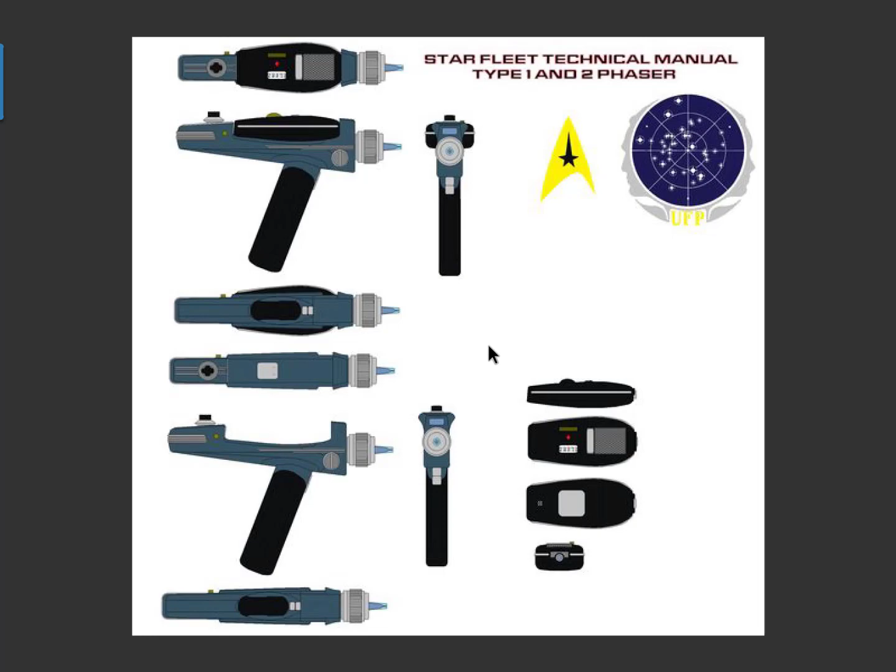I am in Bridge, and I'm going to move this out of the way so we can see what's going on. In Bridge, you're going to use this to work out your ideas. Now, whenever you're creating anything in 3D, always have a reference, have a reference, have a reference. That's how you learn this stuff best. I've got several references here, as you can see. I'm holding the space bar down to go to full view inside Bridge. Bridge is software that allows you to preview imagery. So I'm always using references, and I'm going to use references inside the software itself, so I'll always have a visual cue as to how I'm designing and where the design is going.

Those references, I'm going to show you what I'm using for the software right there. I did a grayed out background in Photoshop, kept the black line on a grayed out background so it's less distracting visually. I've got my front view, my side view, and my top view, and you can see they're lined up exactly, accurately with one another.

So when I bring this into the software, I can design accurately. If anybody has any questions, stop me anytime and ask. Okay, we'll get a little dialogue going here.

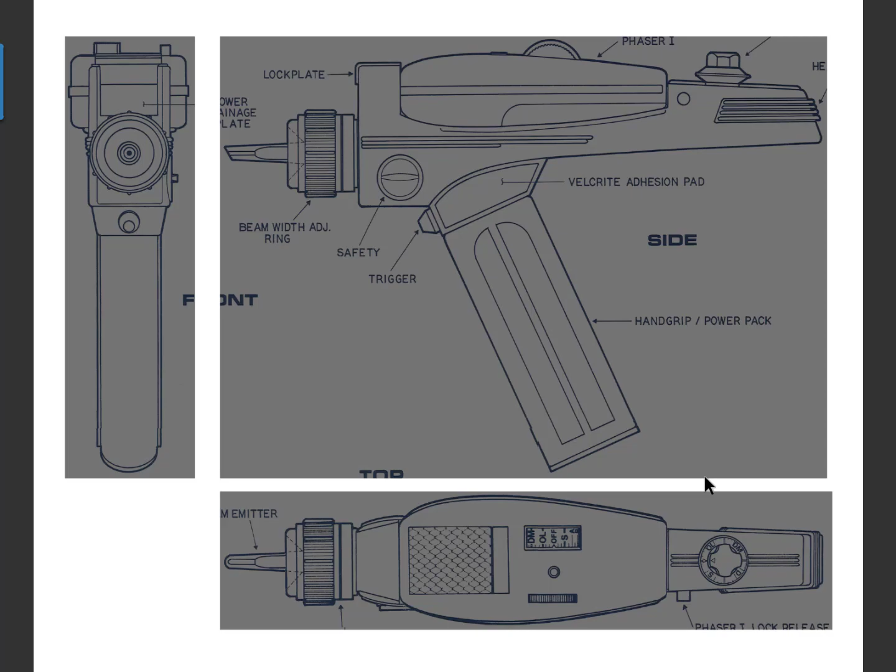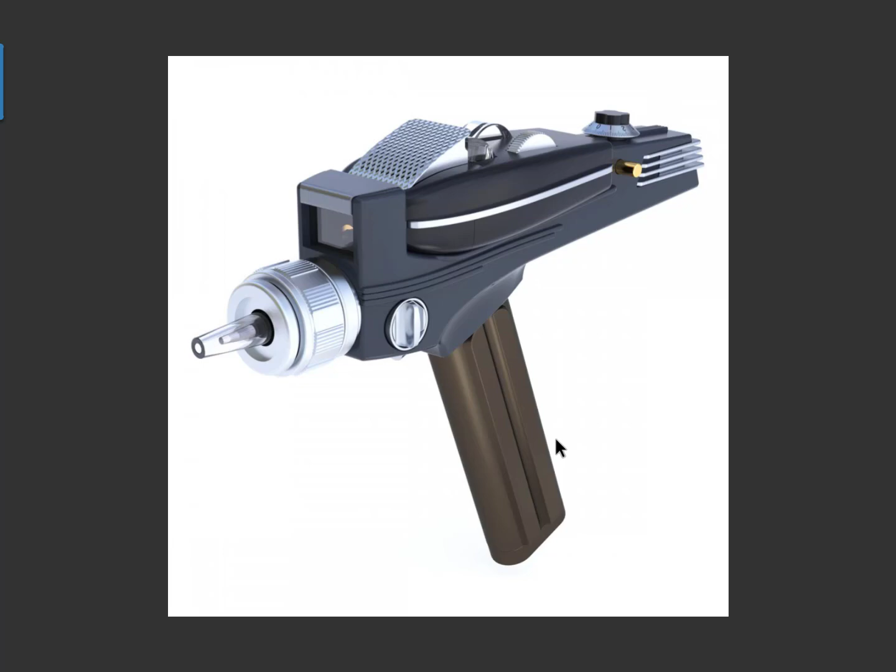So this is what you're going to eventually end up printing out, so you need to strategize all the time. There is no one way or right way to design something for 3D printing. You just have to figure out what is best for you, what's best for your client, and figure it out from there. So I'm looking at this phaser.

I'm thinking, okay, print the nozzle. This I want to print in clear, so I have to think about that. I want to print that in clear, that's going to be a separate piece. I want this here to be another separate piece. I want the body here to be my third piece. Obviously the type 1 phaser on the top here, I want that to be its own piece. The handle is going to be another piece. So you're going to think about how you want to design this.

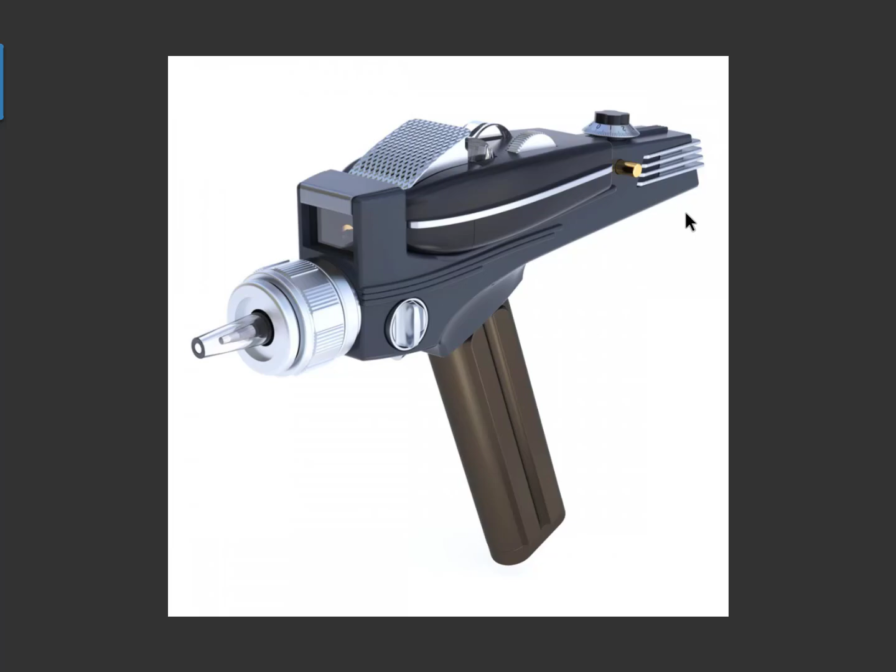So, all right, let's get inside of Blender. I've already created something with the images in there, just to save time, because an hour is not enough time to do this. I'm going to go get that image, go to Open, and I have one called Backgrounds Only. I think I named it Background Only, right there, there it is. Okay, so there's my setup.

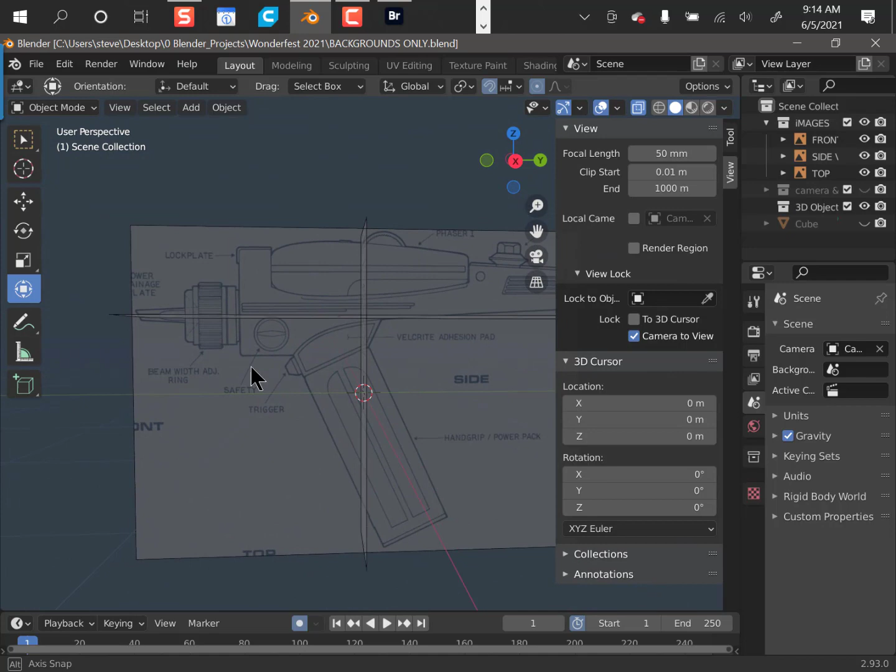All right, so my side view, I got them all lined up in there. Now, does anybody need to know how I actually created it in here? You don't? Yes? Okay, I'm going to show. If I see a yes, the yes wins no matter what. All right, what these are basically are 3D objects called image maps. In order to bring this in, it's really, really simple.

Here's some basic keyboard shortcuts you need to know in Blender: how to go to your front view, how to go to your side view, how to go to your top view. Number 1 is always your front view. Number 3 is your side view, using odd numbers, and number 7 is your top view. It's that simple, right? So 1, 3, 7.

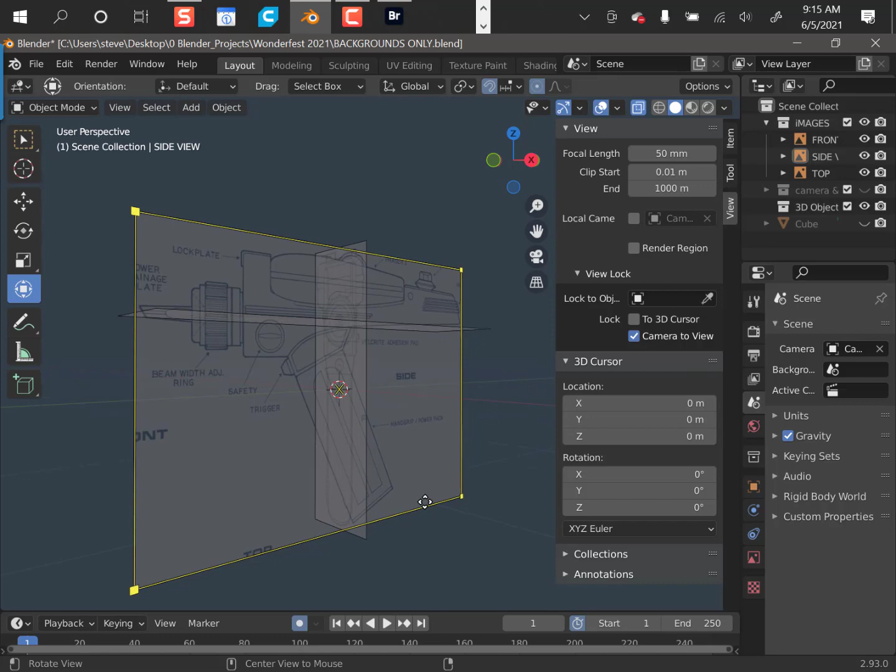If you want to go back to perspective view, hold the Alt or Option key on your keyboard and click and drag, and it automatically goes there. You could use the shortcut number 5 too. You have a PC? Doesn't matter, PC and Mac are the same shortcuts. Alt is Option, Command is Control, that's why I say both. I just don't want someone looking for their Option key and then deciding to commit harakiri.

Well, if they want to commit harakiri, that's not our problem. The Option key, I can't do that. If they want to die over this, that's their problem. I want to create cool stuff.

Okay, all right, so there it is. I'm going to show you how I did it. Go to the front view.

Here's the key: you have two modes in Blender. Your editing mode for designing your stuff, and your object mode to move your stuff around. I want to say move your shit around, but I'm trying to keep this PG. The way you switch between both modes is hit the tab key on your keyboard.

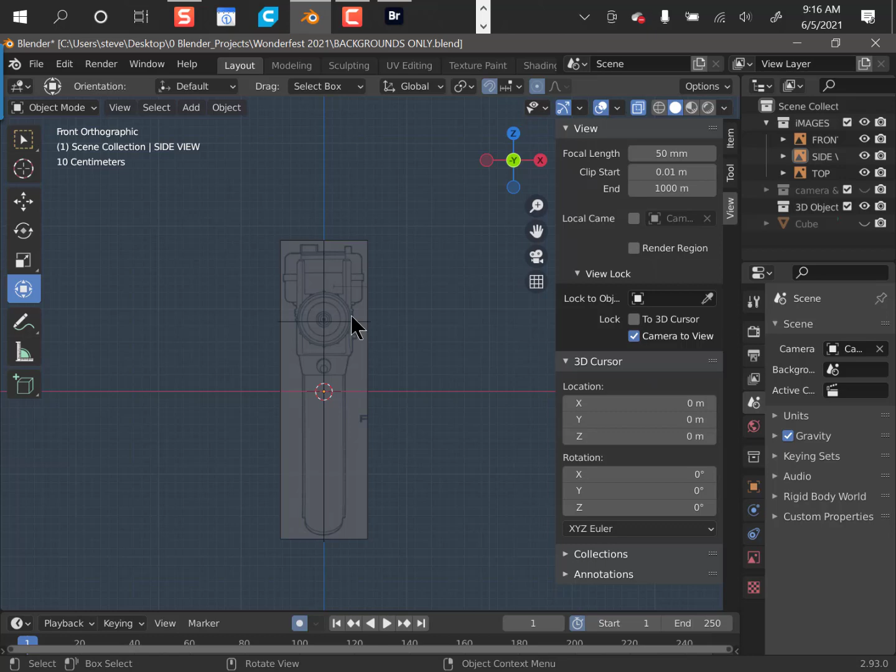So if I go to object mode, I'm in the mode that I can actually bring images in. Now how do I do that? Go to bridge, we'll bring in something different, just for fun. Offset it a little bit off to the side, click and drag it, and release it. That's it, it's that simple, right?

So now if I go on the Blender, Alt, remember, there it is. Do I need that? No. So it's selected, it'll show up over here, it'll be called empty. I don't want it. Hit delete, it's gone. Okay.

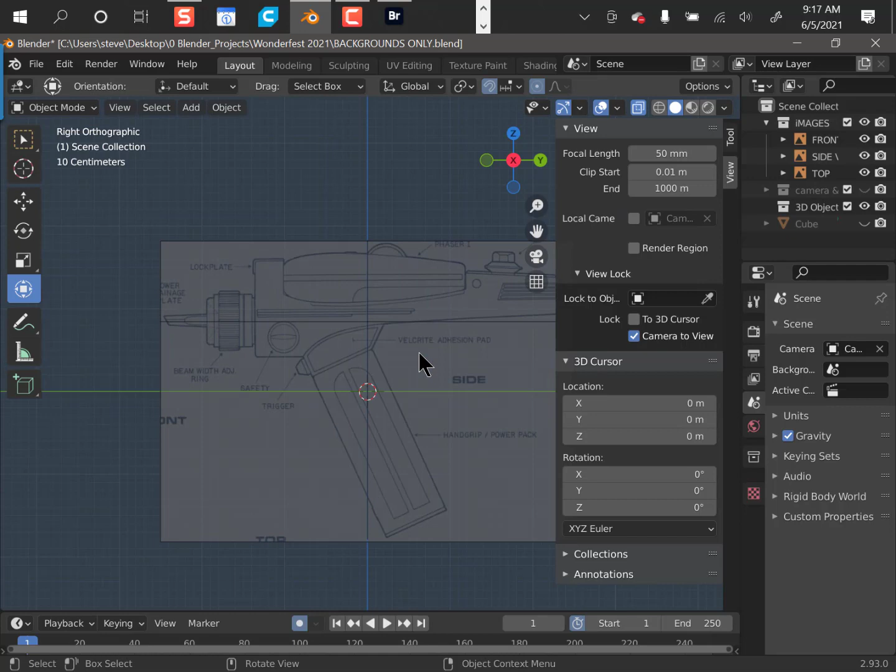All right, now we're going to start designing. One, three, seven, all right, so keep that in mind. Every time you see me switching, you know exactly what I'm doing and where I'm going. Let's go to the side view, number 3. We're going to start planning out together what we need to do.

So we're going to be using primitives. Primitives are pre-designed shapes. You're going to be designing everything you ever want to imagine with primitives, no ifs, ands, or buts. Okay, could you do it point by point? Yeah, but that's OCD business, we don't do that. Okay.

So I'm going to go get a primitive. The way you access all of your primitives and all of your tools is a shortcut called Shift A. So Shift A gives you these different menu systems. We want the mesh, and the mesh we want is going to be a cube. So I'm going to select it, and there's my cube.

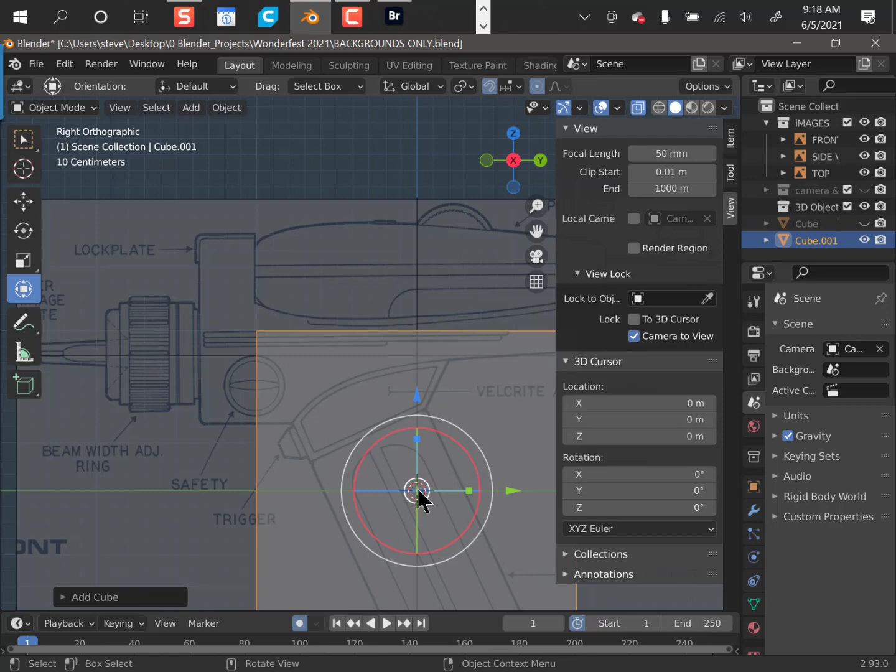Now this cube, I can adapt. I can resize, click dead center and move it wherever I want, or I can use a shortcut key called S for scale, and decide to just resize it down. I'm going to put it about like this. And then a left click will commit my changes. Let's go scope this out.

We're going to start with the body. I'm going to drag it right down here to the bottom, or I'll use the top first. I'm going to try to get it about the same thickness as this top portion here. And right here, I'm using this option down here, called the transform option. This allows me to transform it from top to bottom or rotate it all in one.

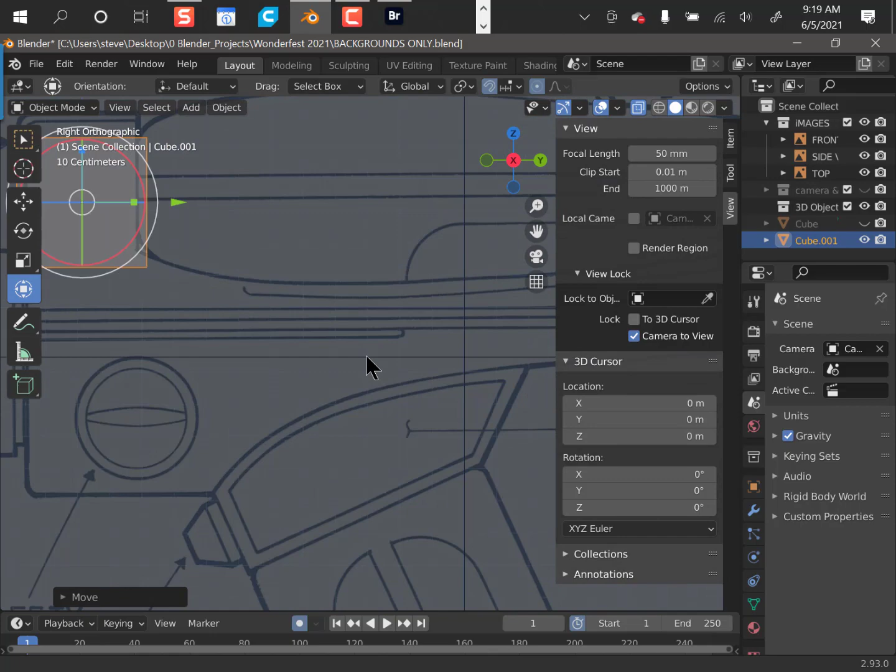So I'm going to hold Control and Alt together, and left drag up and down allows me to resize. Alt and Shift held down together and left click allows me to pan. I'm going to get in close so you guys can see this easier, and I'm going to take this little option to resize on the Y-axis. Okay, that looks good right about there.

Now I'm going to take this and bring it down. Go hit that top arrow there, drag it straight down, and put it right here at the bottom. Now what I'm going to do is I need to grab that top polygon.

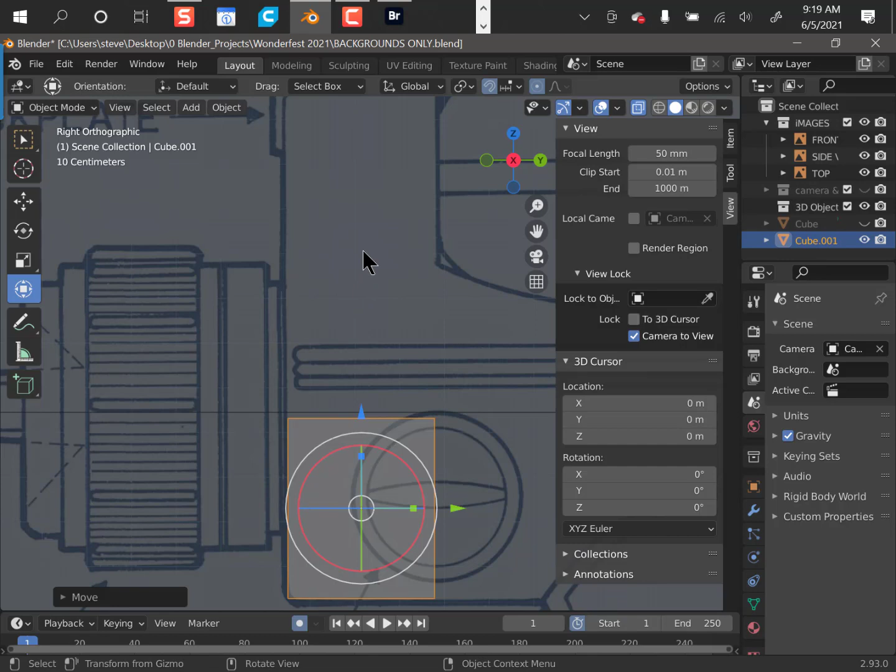Now I need to go to edit mode, so I hit the tab key, click on edit mode, right? Now I can edit my points, my edges, and my polys. If I click anywhere, it deselects everything. Now here's the trick: the number 1 key on the keyboard is for selecting your points, the number 2 key is for selecting your edges, and the number 3 key is for selecting your surfaces or your polys. I want to grab my poly.

Click and drag. And this is the newest version of Blender, it was released two days ago. Blender is a free software, and it's damn good. The Maya people are dropping Maya and going to Blender. It's a professional, tried and proven, ready for production software, and it's a pain in the ass to learn.

Okay, 3D is not for the faint of heart. So if anybody wants to come in, they can come in and sit in the middle aisle here. I saw people looking in back there.

Okay, here we go, the top. Now, if I want to make sure that top is selected accurately, Alt or Option to drop me out of this view to take me into the perspective view. Okay, it looks good. Hit number 3 again to go right on back.

Now, come over here, Transform tool. Bring it up. I'm going to bring it up to right about there. Okay? All right.

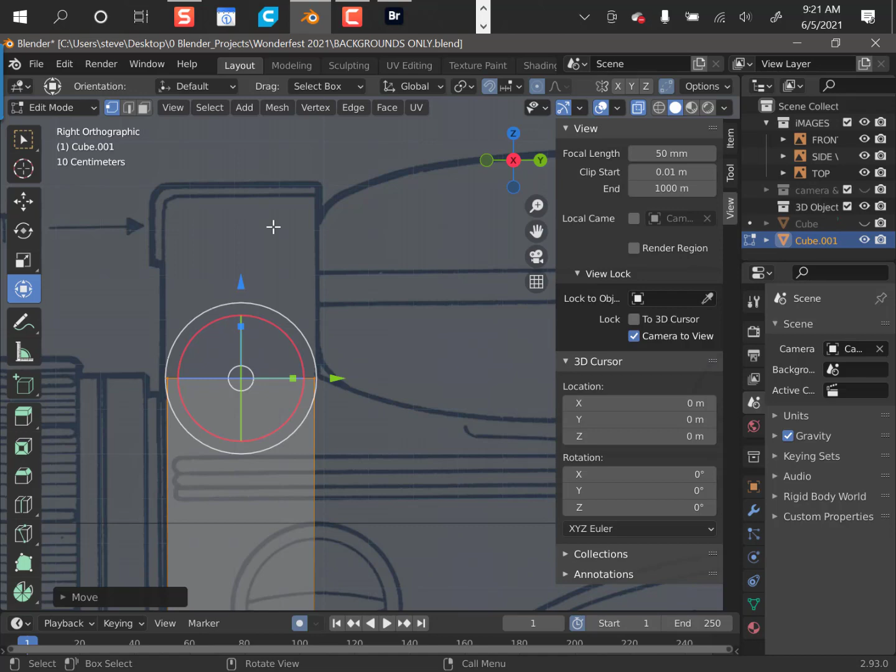So what I want to do next from here is extend another piece, because I need a section going off to the right, and I also need another section extending to the top. I'm going to do the top first. The shortcut for extending anything is, what do you think? E. Hit the E, it automatically extends it along its normal, right? I'm going to left click and it commits it. Okay.

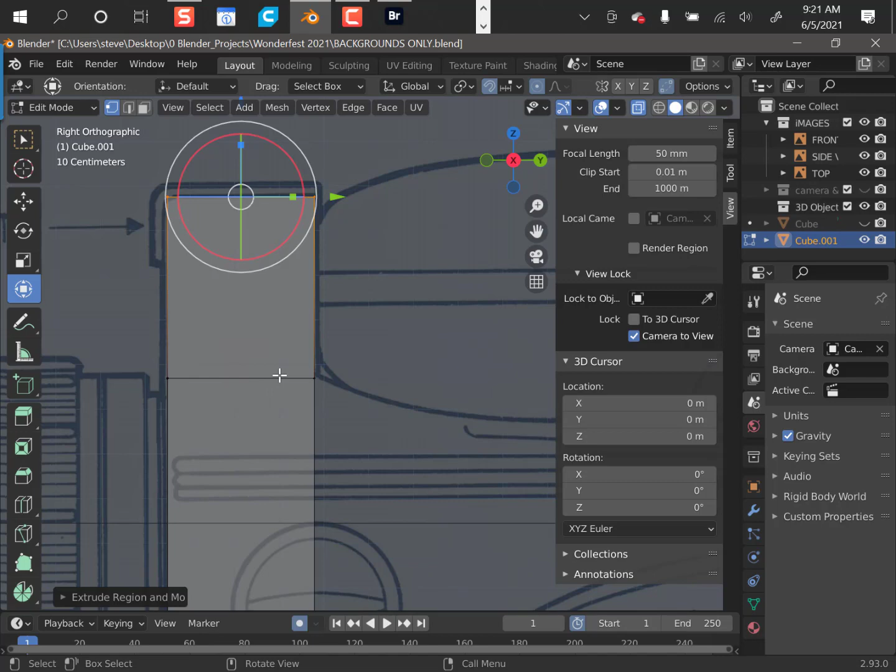That is not two separate objects. That is an extension of polys on one object. So if I click and drag it here, and kind of pull it on over here.

Here's another little option I think you guys might enjoy. If I go to my edit menu, go to my preferences, those shortcuts I just mentioned about navigating, you will find under the input. You emulate 3-button mouse, make sure that is checked. Okay, there's another one too that I'm trying to remember.

I think it's under... it's for allowing me to rotate around my selected objects. I think it's under navigation. What was that? That's it, do you see it up top? That's it, right there. Okay. Once that's selected, it'll orbit around whatever I have selected. I find that very handy.

All right, so I'm going to bring this down, zoom this down a little bit, bring it to the side, and let's go get this side over here. So I'm going to come over here, grab this polygon. Make sure I'm in edit mode, by the way. Go to edit mode, rotate this around, and go grab this.

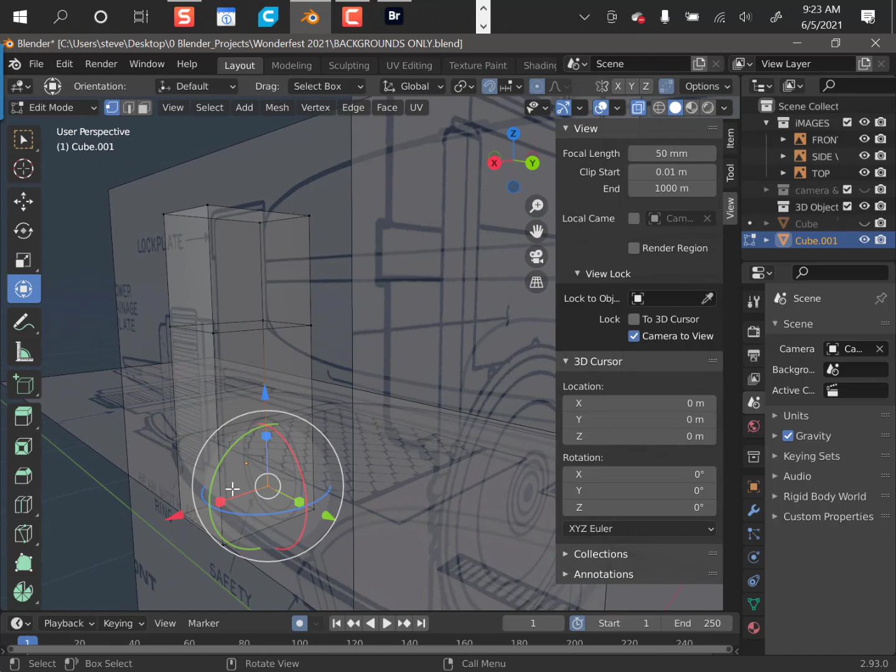So it's still... oh, I'm in point. Sorry, what key do I need for polys? Excellent, keep that in mind, it's going to be a test afterwards. So there we go, hit the 3 key, go back to this mode here. I'm going to zoom back a little bit, and I'm going to extend this with the what key? E. Yes, sir.

So the question is why is it going to extend from this polygon? And the reason it's going to extend from that polygon is because it's selected.

Oh yes, okay, that's a good question. So the question is are these two separate polygons when I actually split these two from the extension? That is correct, they're now two separate surfaces. Okay, so if I hit the E key, it's only going to extend off that one.

Now watch where I'm going. I'm going to go right to the beginning. See this little bottom handle thing right down here? I'm strategizing, right? I'm putting these in a position for a reason. All right, so let's keep thinking.

I am going to go to right about... before I even go any further, let's do this. Let me go back a little bit. I'm going to go back one step, all right? Go to the top view. And the reason I'm stopping here is because I want to make sure this matches from the top view.

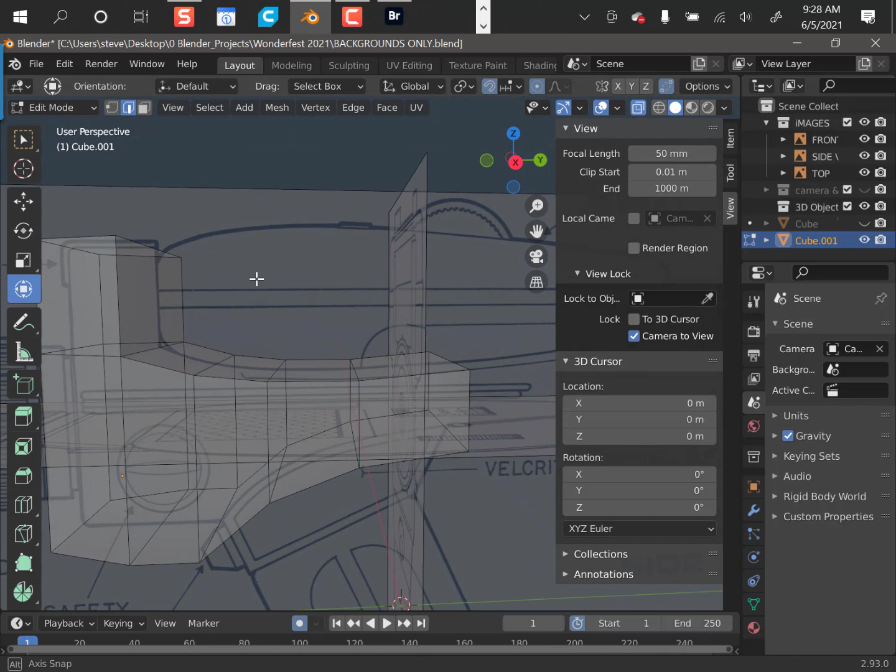All right, now just for fun of it, take a look at it. Okay, cool, look, it's getting there. It's getting there. Hit 3 key, go back. Time to go back to work.

Now, I stopped here, I started here. These little sections where this bottom portion of the handle is, I stopped at each of these sides for a reason, because I know I want to extrude a shape out of this. So I have to make sure I have the polygons in place.

All right, okay, here we go. So now I'm going to extend this out. Number 3 key, same thing, same work mode.

E key for extend. I think I can probably take this to right about there, that'll be good enough. Click it, bring it up, push this back to here. That's really where I want it to go.

Why do I want it there? That's right - if you take a look at this, this needs to extend up, so I got to strategize. Okay, I need some... matter of fact, I might want to grab that surface, just move it out a little bit more. I'm being anal at this point.

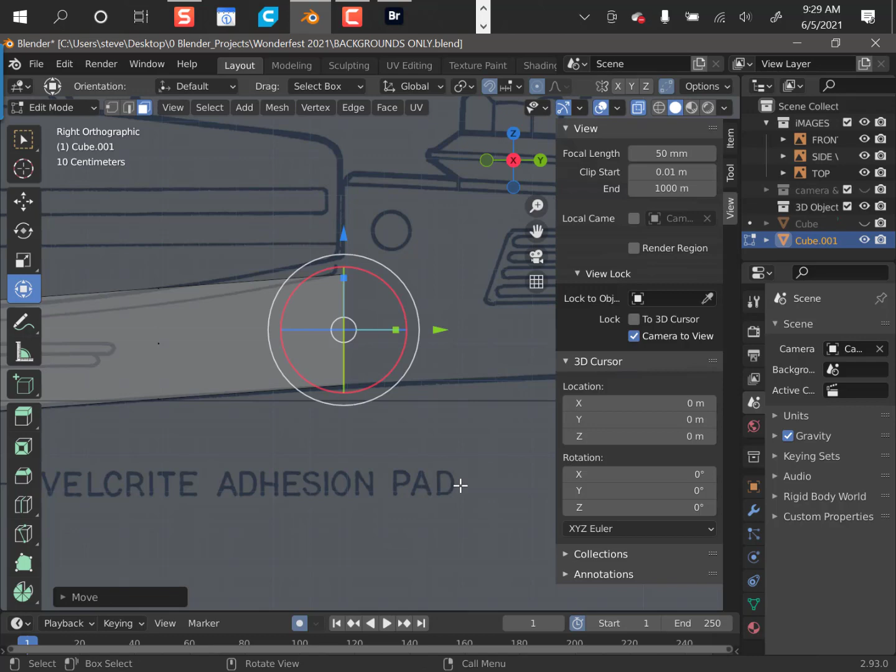Okay, so I'm going to push it on back, and let's extend this again. E for extend, pull it on out to here. Left click. I can just click in the middle, put that about where I want it to go.

Go to the number 2 key for the edge, and then place the edge where I want it, just like that. Making sense? Okay, let's go get the surface right there and do what? Excellent - extrude, just like that.

Done. Hit the number 2 key, grab that piece. Making sense? All right, so we're not done.

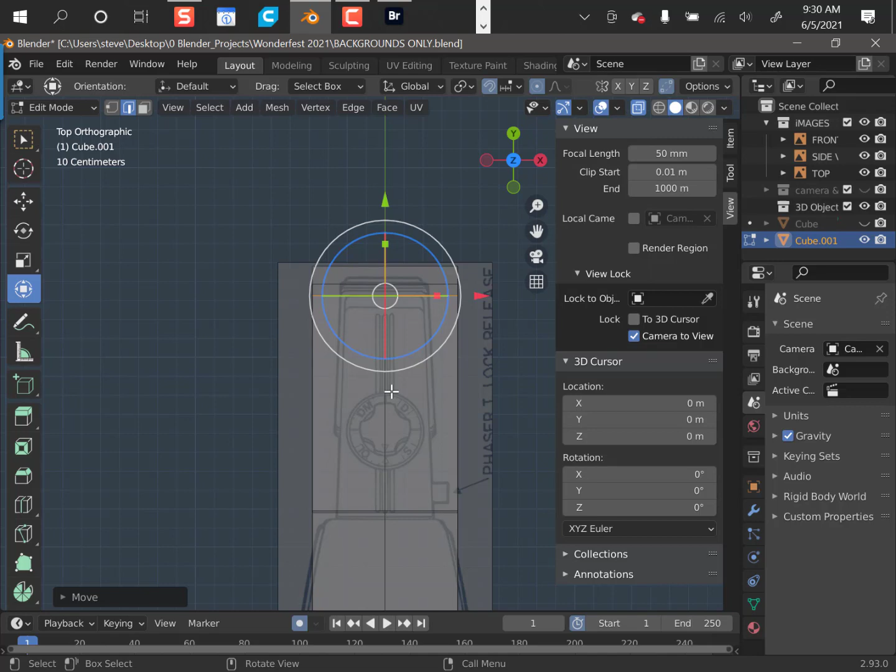Go to the 7 - if I hit the home key, it fits everything in the view, but it's also including my cameras and my lights. So if I go to the cameras are off, it doesn't matter, I'll just zoom in and manually zoom in forward.

Now I know that this taper actually tapers, right? It's not going straight back, and we can see this from the design underneath. So what we're going to do, let's go back to here, let's get in close.

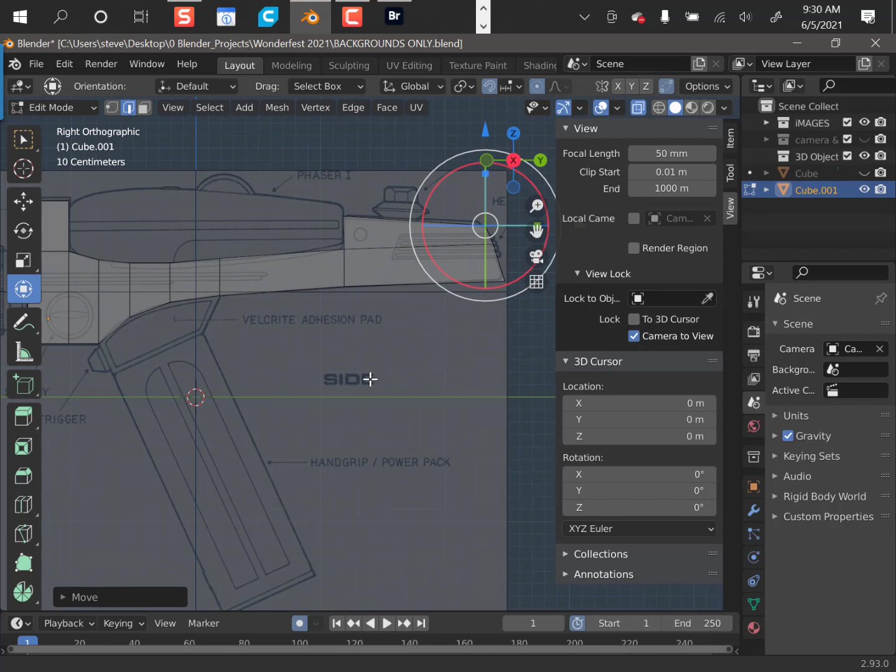And right about, let me go hit number 2. And right about there, that edge there, I want to start there. So I'm going to...

See, what we'll do is, I'm going to come right over here, and I'm going to select everything - you're going to see why in just a moment - from this edge back. So number 3 key on the keyboard. Let's see if I got that there.

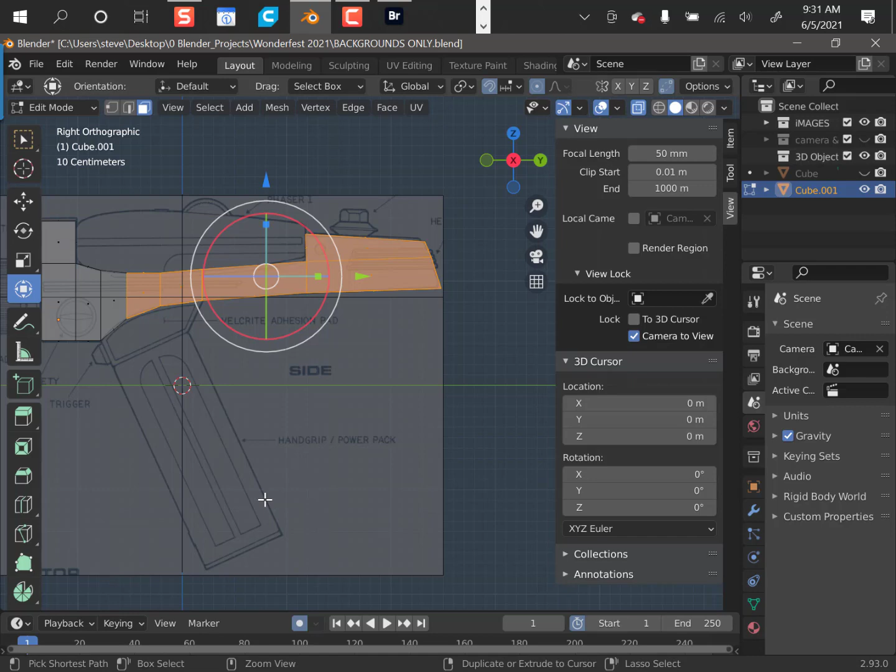Did that work? I think that worked. I'm going to Control plus, which allows me to extend the selection. Control minus allows me to retract the selections. So from here...

Okay, I'm going to go to the top view, and I'm going to start to just manually taper this, just for educational purposes. So I'm going to pull that in just a little bit. Just a little bit. Control minus. Pull that in just a little bit.

There we go. And I'm going to pull that a little bit. Control minus. Pull that in. See where we're going? Control minus. We're almost done. Pull that in a little bit. And we're almost matching the back end where we need it to go. Control minus again. Just a little bit. Control minus. Okay, I think that's going to work. Yep, I think that's pretty close.

Okay, so now we've got the shape of our phaser. We're done with the body. Alright, so now what we need to do is extend out this little bottom portion here, right?

So if we go back to Bridge, let's go to pull this on over here so I can get this on over. Can I tap on Bridge to bring this over? Let's see if I can do this. Okay, so this little section here, I've got to extend out. Okay, so now we have to make that happen.

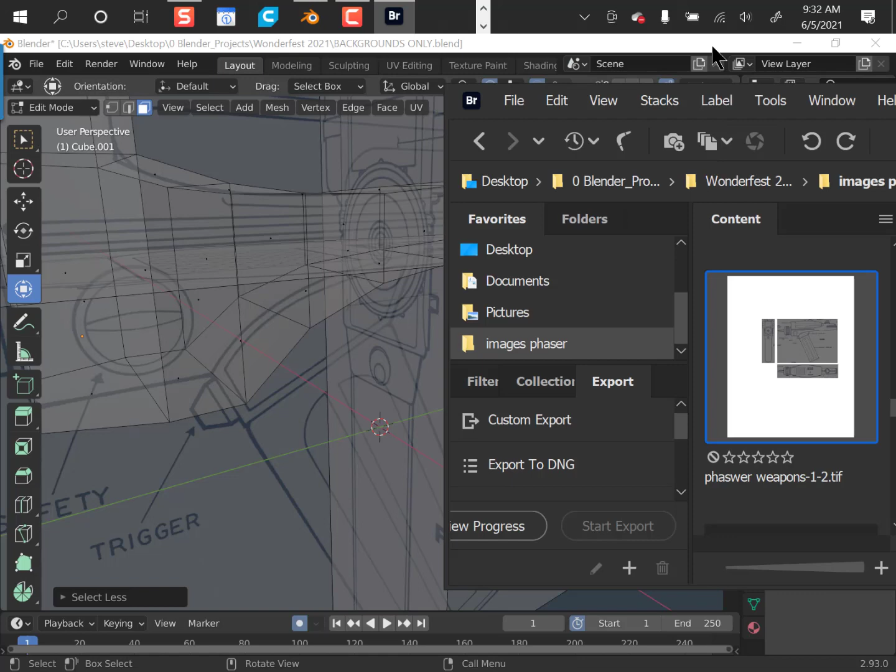Let's go and grab that. Go right underneath here. And what we're going to do is I'm going to make sure I'm in the polygon select mode. That one. Now, I selected the wrong thing, so I want that one. Hold the shift key, we'll add to it. Shift key, add that one. So that's the surface I want to extrude something.

So what I'm going to do, but there's a little bit of a bevel to this, is inset those polys. The shortcut is hitting the I key on the keyboard. And look what I can do, I get to inset a little bit. And I'm going to left click and it commits my changes. I'm going to get in closer so you guys can see it easier.

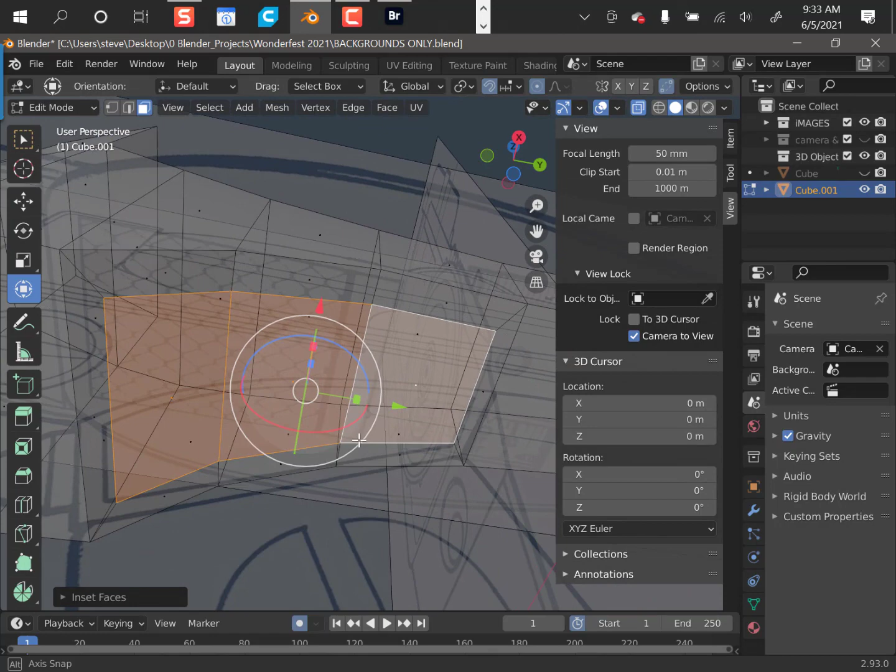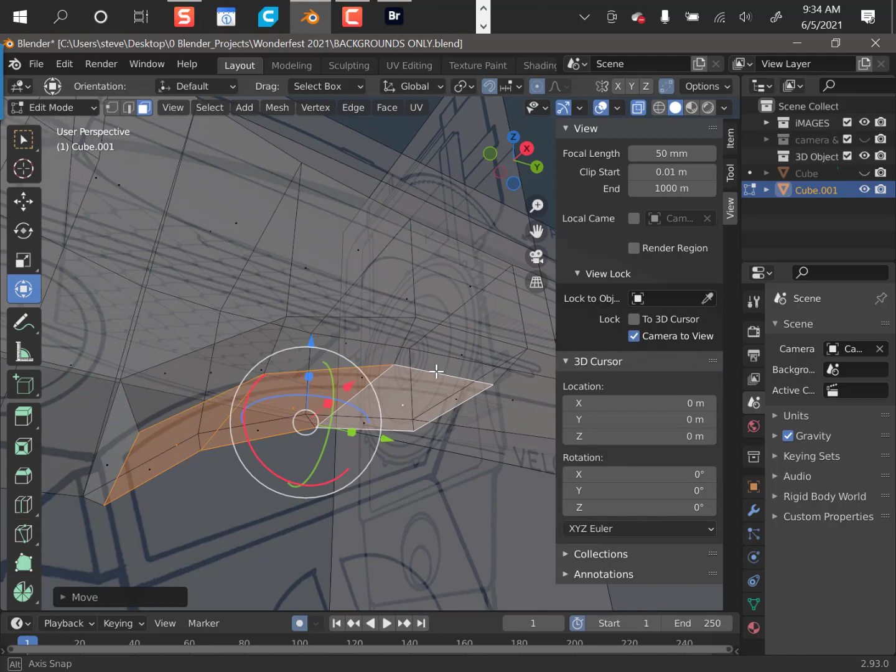Now if I go to the E key, I can now extend that out. See? So now, Alt key, there it is. You've got your extension. Okay, so let's take this and let's extrude this. Go to the side view, and if you take a look at it, really, it's really this little thin line up in here. I've exaggerated mine. If I want to be more accurate, I can always bring it up like this and do something like of that sort.

Now, I'm going to hit the E key, and it's going to extend that out. Done. All right. So what I'm going to do is straighten this out. And I guess what I'll do is I'll go to number 2 key, select those 2 edges, right, all these edges right there, and just line it up just like this. Go grab this edge there and bring it over.

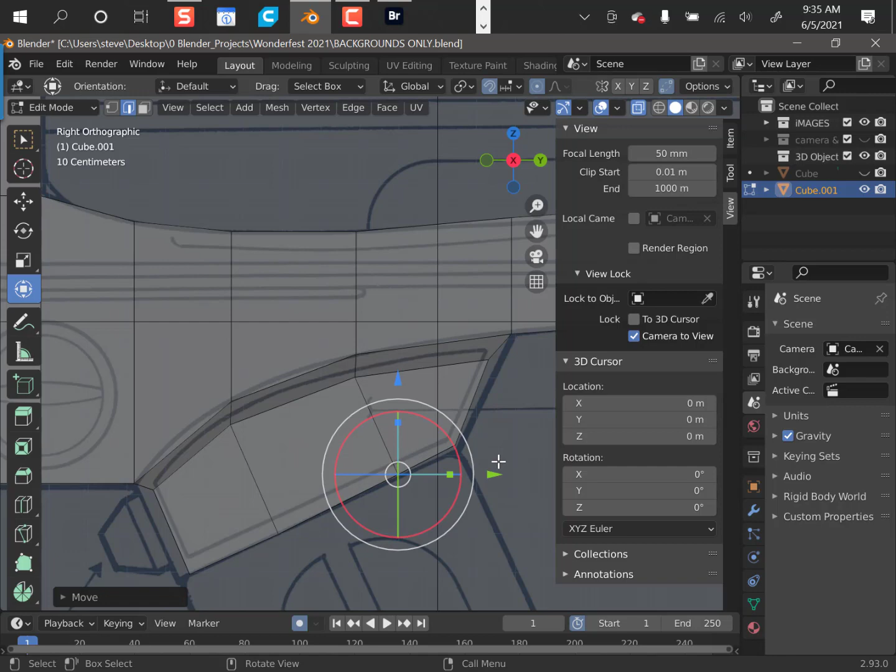Mine will be a little bit low, just inside, but that's alright. You guys get the point. In fact, I might just go ahead and bring this on down. There we go. Okay, there we go. So, Alt click, drag it out. See? There's the bottom portion. Oops, get out of here. There's the bottom portion of our phaser. Is that making sense?

Alright, so that's the type 2 phaser. Let's do the type 1, the one on top, right? So, no questions at this point?

Someone else had a question?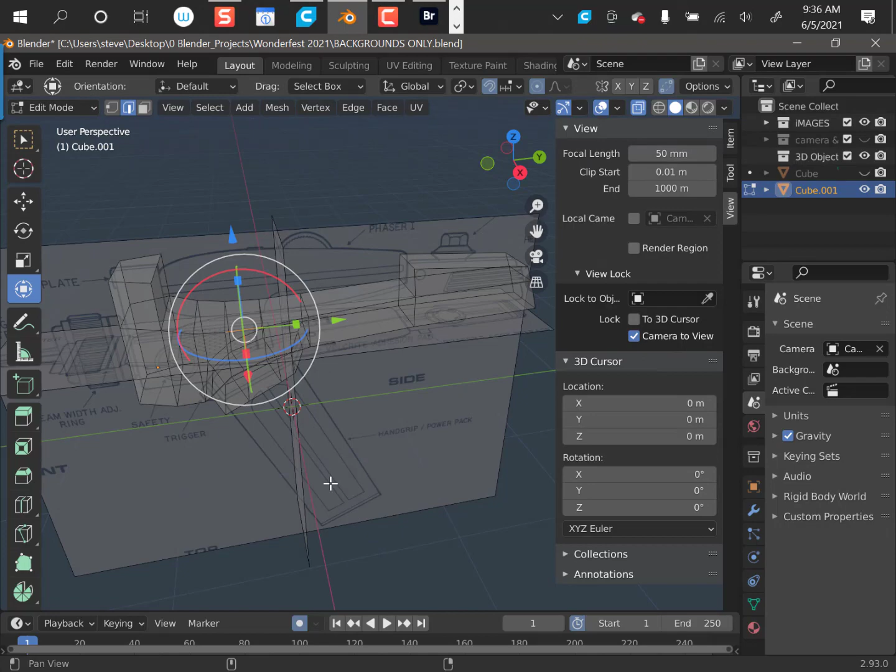That's right. Okay, so the question is that he's noticed I'm using two-dimensional images here that I'm utilizing to create my wireframe. And the question is, did I create those? I just went online to Google Images and found the images, and that's basically in Bridge here, which I can't see. Like, there we go. I won't move that out of the way again. That's where they came from, right here. So I went to Google Images, found... Actually, I'll show you the actual one I used. I should have it in here, right there.

That's it, that's the actual one I used. That is correct. I sliced the pictures out of this, turned them black and white, made sure the lines are really dark so it's easy to see, and then dropped the background to medium gray, from white to medium gray. We don't have time to go over that.

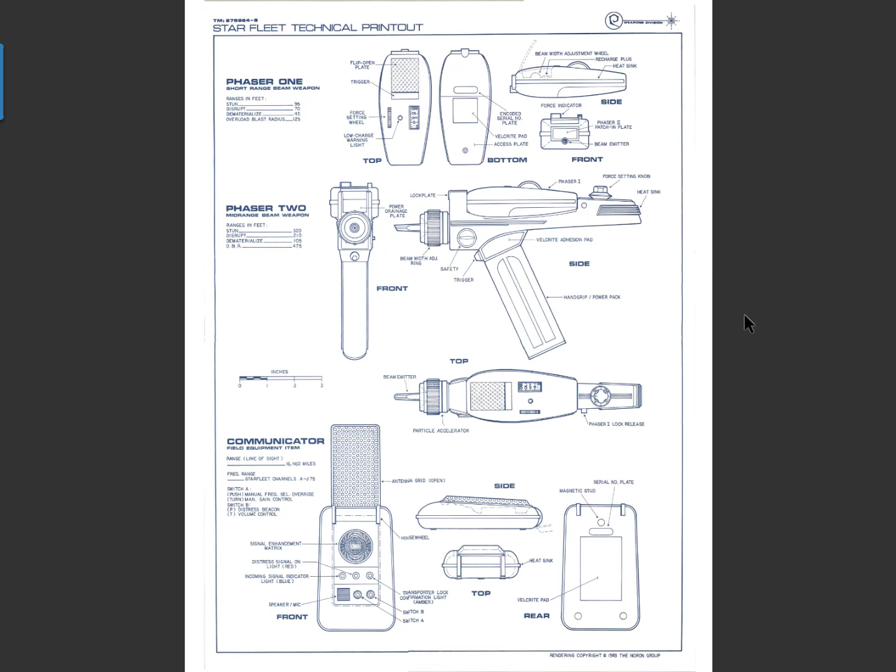When you extended the bit to go to the grid, and you've got 3 polygons across there and you were lining up the edges, how would you go about combining all 3 of those polygons into one flat surface? You don't. You don't want to do that. You want to keep those surfaces.

How many people here like podcasts? Nobody does podcasts? What was that? Oh, just listen. Just create them, create them. No, okay, all right, that was another question I was going to ask.

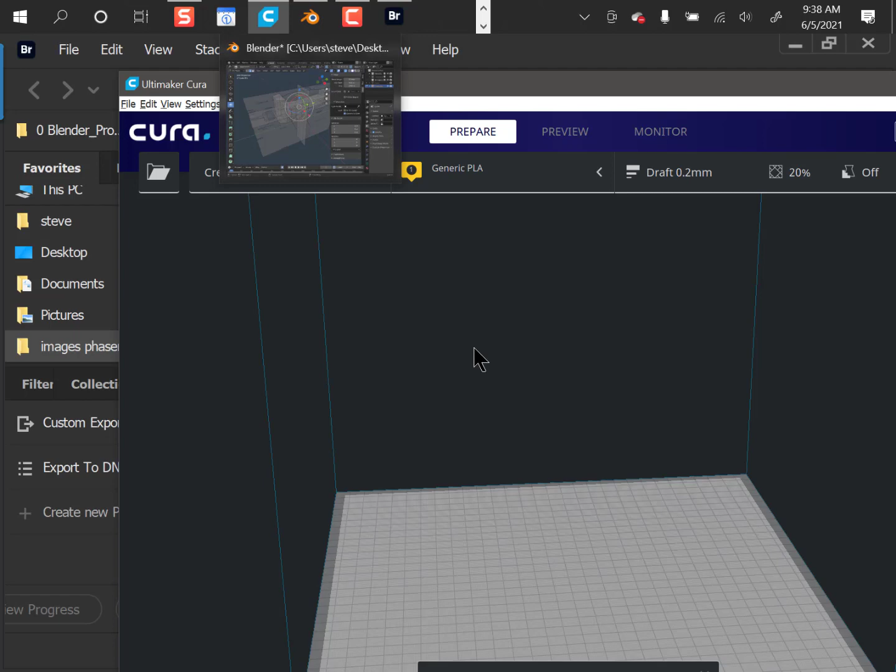But anyways, let's get back into Blender. This is a 3D printing software. I want to show you what's going to happen to them once we create them. But anyways, we'll come back to that in just a minute.

And we'll move right along. So we're going to come up here. I'm going to quickly create the type 1 phaser, and then we're going to go and do the nozzle. We're not going to have time to finish the whole thing, but it gives you the thought process and standard techniques you're going to be using to pretty much create anything you want in Blender.

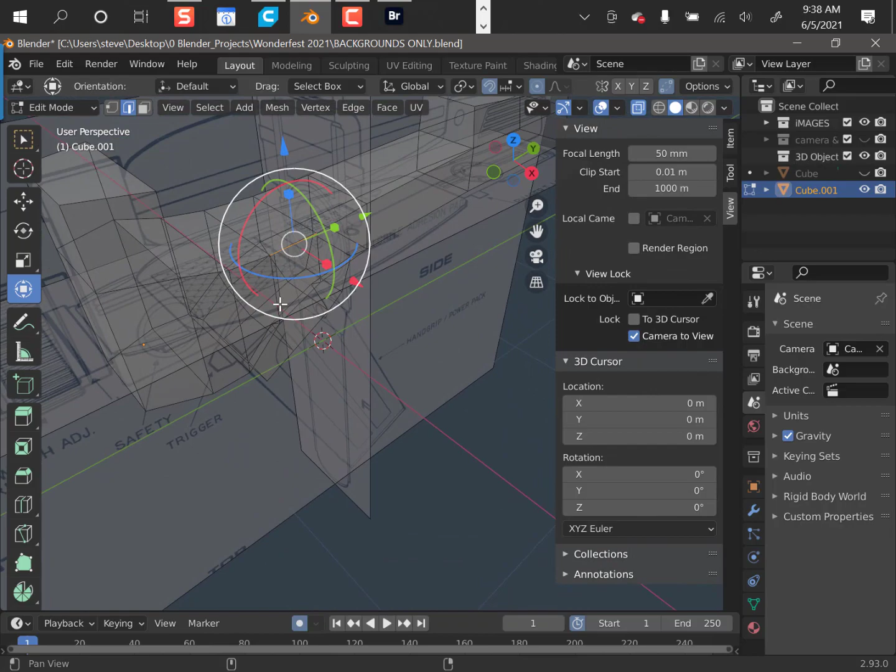Blender is very powerful, there's a lot of different tools, so you get to learn all the advanced stuff as you kind of move along.

All right, so here is my, let's go to the top one. Now, over here to the right is your collection view. Yes, sir. That's what I'm getting ready to do next. Yeah, watch me, I'm going to show you how to do it separately.

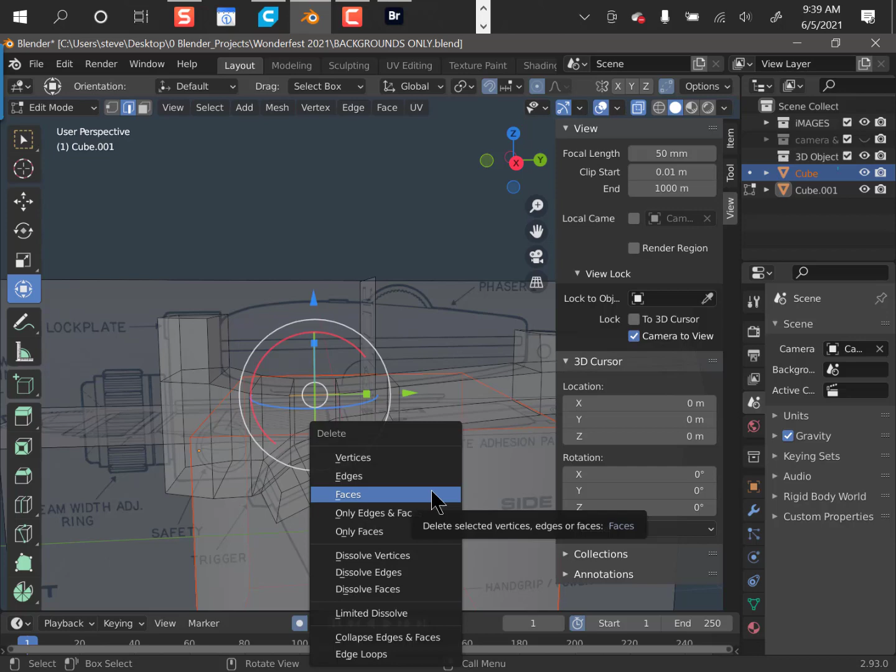Okay, so here is a view of all my different objects. I think this is a square that was already in there. I'm going to target that one and delete it because I want to delete everything. Oh, I can't do that. I'll just turn it off and ignore it. Oh, I'm in edit mode? Oh, that's right, you're right. I'm sorry, my fault. I've got to go to object mode.

There we go, and that's the cube I have targeted. I'm going to hit the delete key. It goes away, good, all right, get it out of the way. We're going to do it from scratch so you can see how to add other objects in there. All right, here we go.

Shift A, go to the mesh, I'm going to add another cube. And there's my cube. Now take note, I've got another cube here. Let's see, are they 2 separate? This is very interesting.

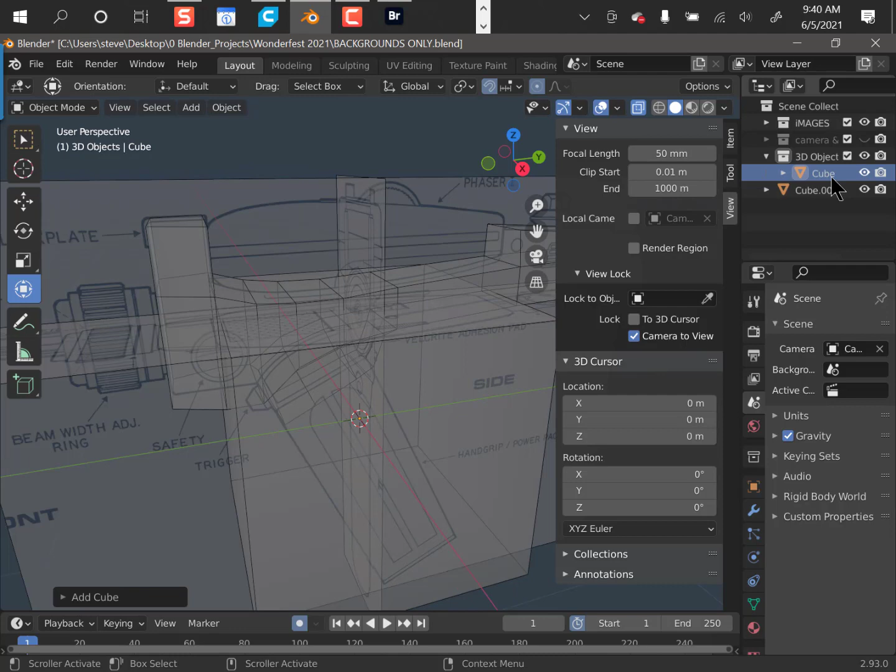This is the newest version of the software I just downloaded yesterday. It looks like it automatically did it, it automatically separated - we see 2 separate objects here. Like this is my body, right? The body of the phaser.

So I'm going to call this one body. I can double click it and rename it. And I'm going to call this one type 1. All right, so that's going to be the face, this is going to represent the phaser on top. So I can kind of keep organized here.

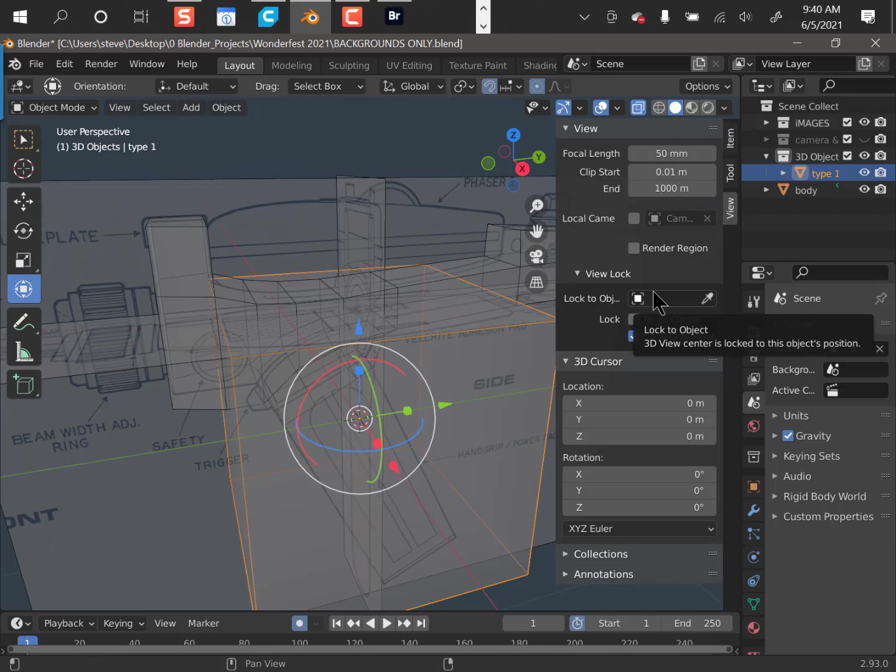So I will just grab it up here. Now, this other stuff that I create here may be in the way visually, so go to the body and turn the eyeball off, and that gets rid of it. If you want it back again, turn the eyeball back on. All right, let's turn it off.

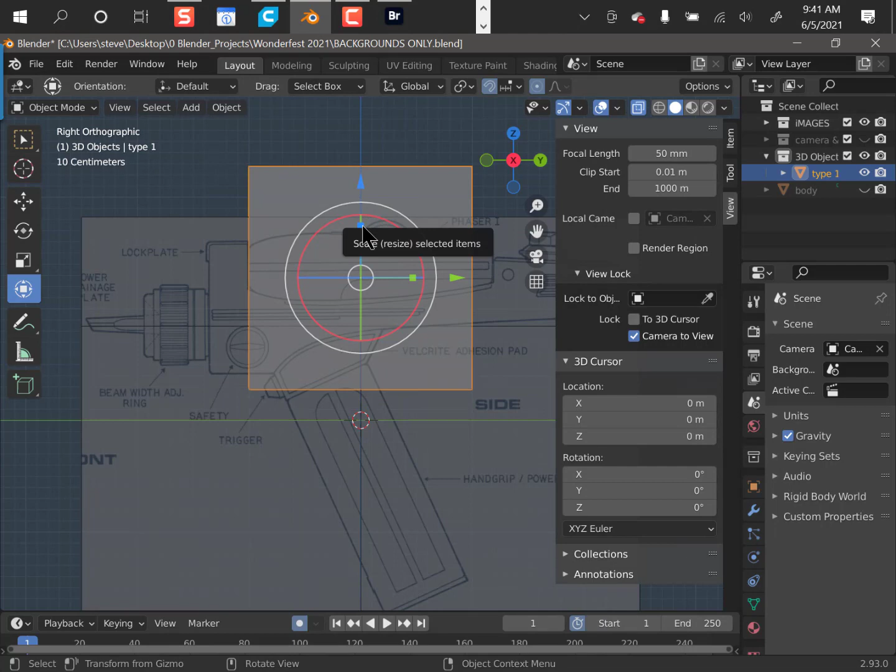Let's go to work, let's go to my side view here. Let's go ahead and stretch - oops, I didn't mean to do that one. I want to grab that little guy there and stretch it up to match my type 1 phaser. Okay, move this on over and kind of match so we can match the length of it.

And that's all we need to do. Go to my top view, right? And match its thickness. Okay, we're there. Now, here's where the fun begins - how do I split this up to shape it at this point?

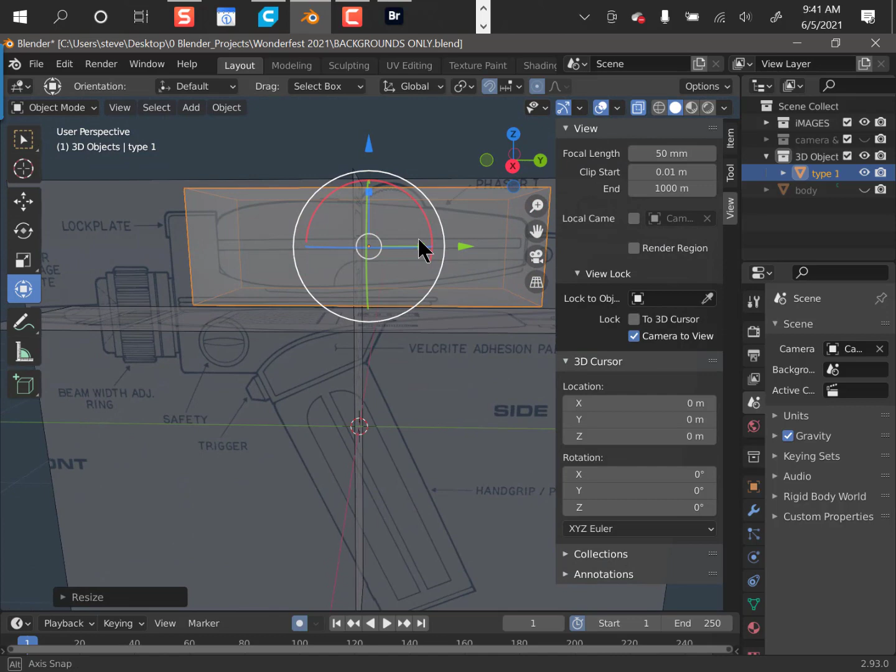Cool little tools in Blender. If I use Command or Control R, it gives me a tool. I gotta go to edit mode first, so tab to edit mode. Command or Control R gives me a tool that adds slices. If I click on that tool, I can move that slice around wherever I want it to go. Alright, I'm going to hit escape so I don't make any changes.

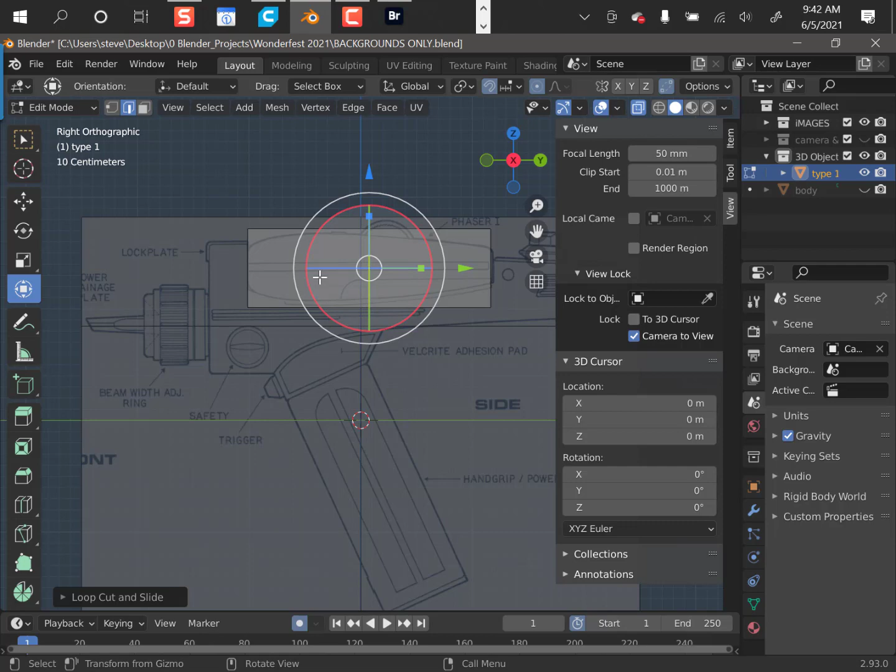I'm going to hit the 3 key and start working on the side view first. Let's get in close so we can fill the screen with our object. Now, Command R, go to the side here. I think I'm going to put one. Oh, this is a better way to show you this. I'm going to need several of these slices, right? Okay, Command R.

And I'm going to put it here. Then I'm going to hit the roll key on my mouse, and it adds in additional slices. Then I can click and hold and drag this wherever. Now see, actually there was one in the middle here that I didn't mean to be there, but we'll work with it.

Okay, if I have a slice, I can still edit this slice. If I right click, I have what's called... edge, not edge slice, it's called... oh, somebody's going to ask a question. No? Oh good, what was that?

Where's slide? There it is, right there. I can continue to slide. So say I'm on this one, right about there. Double click the slice, it will select the entire slice loop. Right click, edge slide, put one there. Double click the loop, edge slide.

Right click, edge slide. Yeah, I think that'll work there. I'm going to double click this one, edge slide, so I'm going to have that little in there. The rest of these I'm going to leave. Actually, I'll go ahead and move this one just a little bit, edge slide.

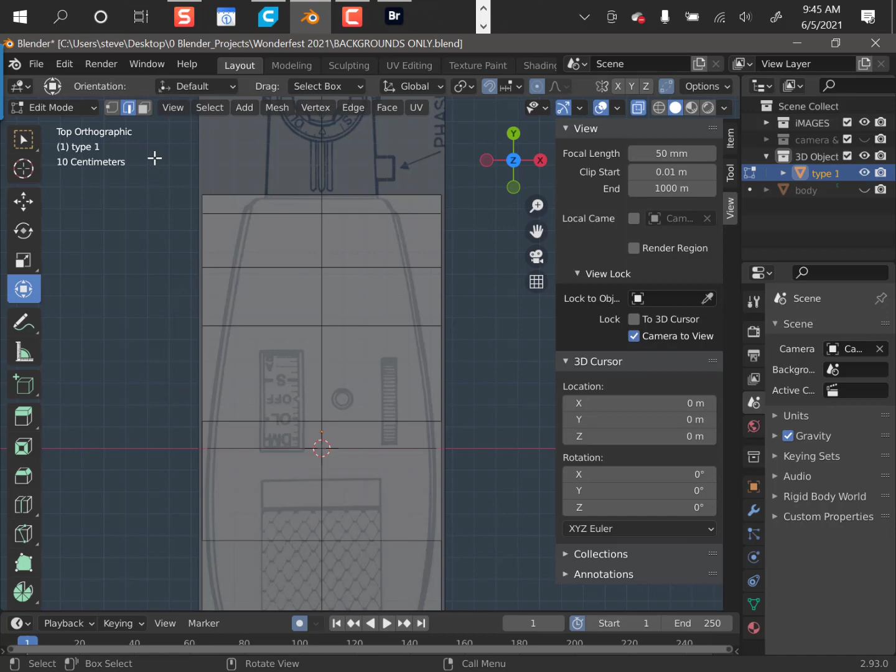Alright, so my time's almost up here, so I'm going to complete this and show you how to round it off. Alright, go to top view. Same thing, so go over here, grab all those, edge them. Oops, sorry, rotate that. I was going to edge these in here, right? See, we're just shaping out that object.

That's where I can go to the Control minus view and do that little technique. Alright, Control minus, it just drops down. Let me do Control plus again because I went too far on this one. There we go, Control minus. And it's a patient person's game, right? Be patient. Oops.

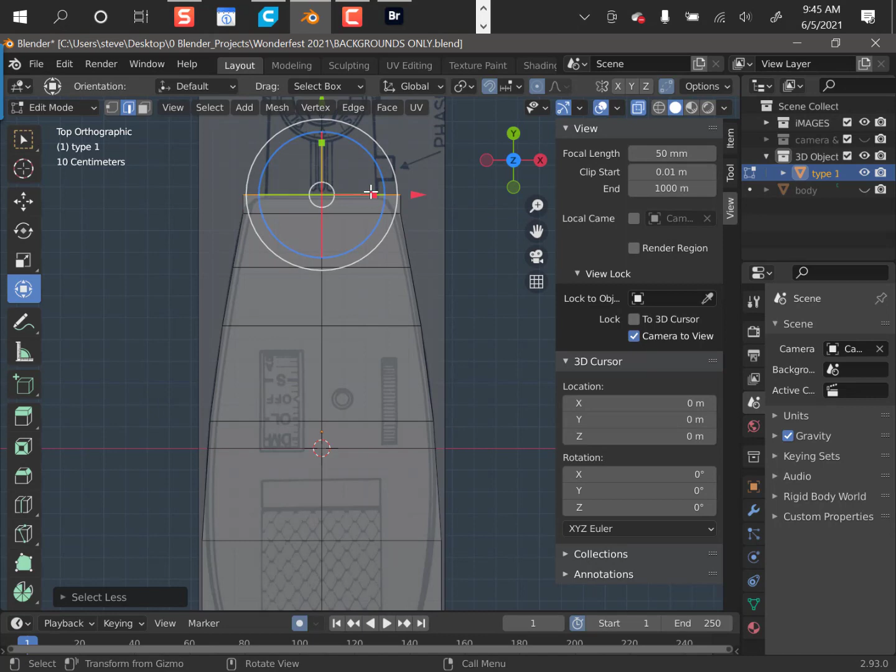Alright, and Control minus, and there it is. Okay, let's do the front view just real fast. All I need is just those there, right? So just right about there. Maybe pull that in a little more. Okay, Control minus. Here we go. Alright, let's go take a look at it.

There it is. Alright, now here's how we're going to control it. We want to control the roundness, so what you're going to do is add a modifier to this. We're in the type 1 phaser. So let's go to object mode, the object is selected, and I'm going to add a modifier.

The modifier that I'm going to add is right down here, this little gear system called Add Modifier. If I drop it down, I have all these modifiers like bevel and boolean and mirror and all types of stuff we don't have time to get into. But the one I'm interested in is called Subdivision Surfaces. Subdivision Surfaces is going to take those rectangular shapes and smooth them out into curved edges. And if I click that right now, look what it did.

All right, let's get in close. Okay, now we're starting to move in the right direction. You have options for that modifier. Blender is non-destructive, so we can come back and edit this anytime we want.

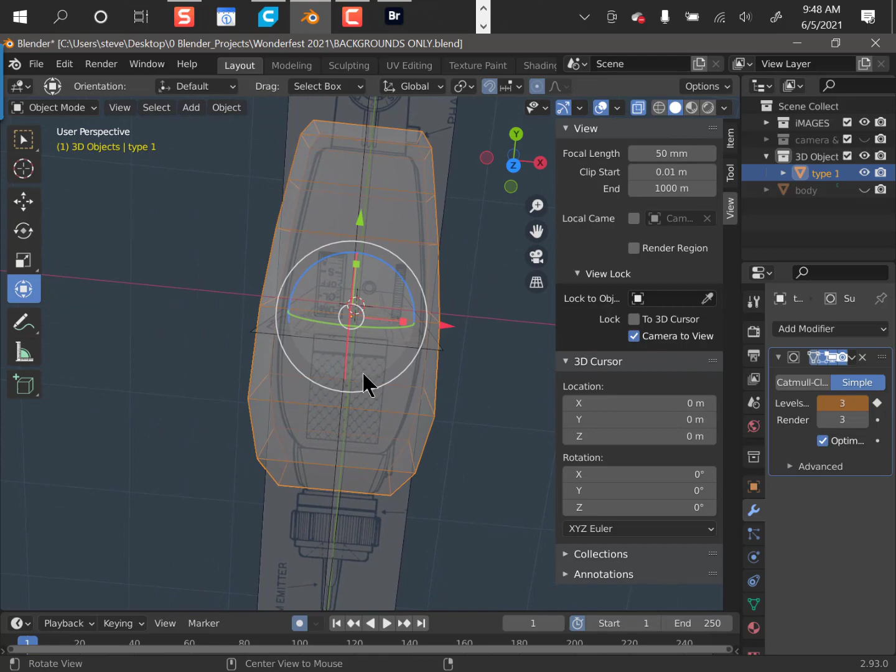So what I'm going to do is add in what's called edge loops. The edge loop is going to hold the shape of the piece. So let's start up here. Command R - oh, I got to go to edit mode first. Go to edit mode, Command R, click and hold and move one to there to hold that edge, and left click.

I should have probably just did the roller thing, but Command R again and hit and hold that edge. Go to simple, get out of simple mode, gotta go to Catmull-Clark mode. Boom, see? Now I'm gonna show you the full visual mode in just a little bit.

I want to do the same thing for the top and bottom here. So I'm gonna go into simple mode, Command R, put one here - oops, I went to the other axis. Okay, let's escape. All right, so Command R, I want there. Now roll that so I get 2, that's all I need.

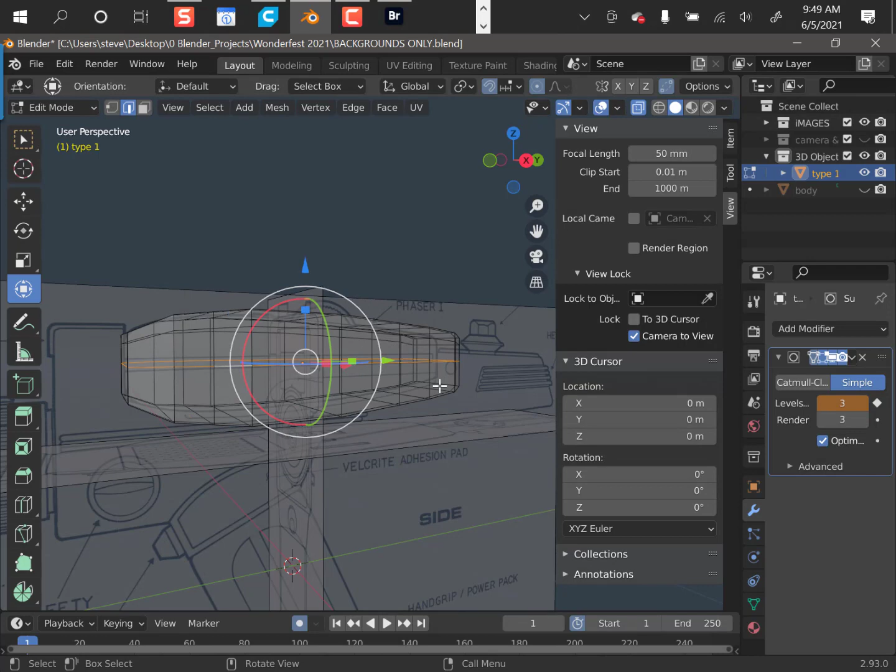Click it. I'll put one up here, and then down here, go to my edge edit mode. Let me rotate it around so I get the right edge here. Gotta jump out of edit mode somehow. Okay, there we go. If I double click it, it'll do that edge - right click and you do an edge slide, bring it on down to here. That is gonna hold that edge. See that? It's holding those edges.

Now we get out of simple, go to Catmull-Clark mode. There it is. Okay, so if I go to this mode, you can see what this is going to look like - it gives you a very good idea of where you're going. Is that helpful? Or is that boring? No, it's interesting, isn't it?

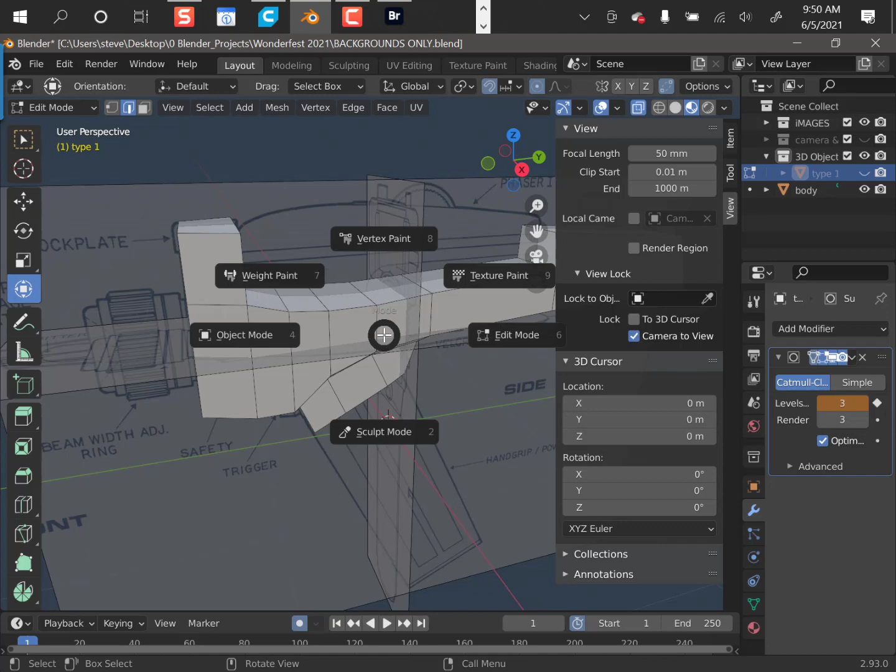So let's go to the body just real fast. Let's turn off the top, turn on the body, and we're going to do the same thing to the body. Go to object mode, click on the object, add a modifier, add subdivision surfaces, boom. Make sure it's 3, okay?

All right, go to simple mode, let's hold these edges here. Command R - oh, gotta go to edit mode, my fault again. Edit mode there, all right? Command R, click and hold that edge. Command R, click and hold that edge.

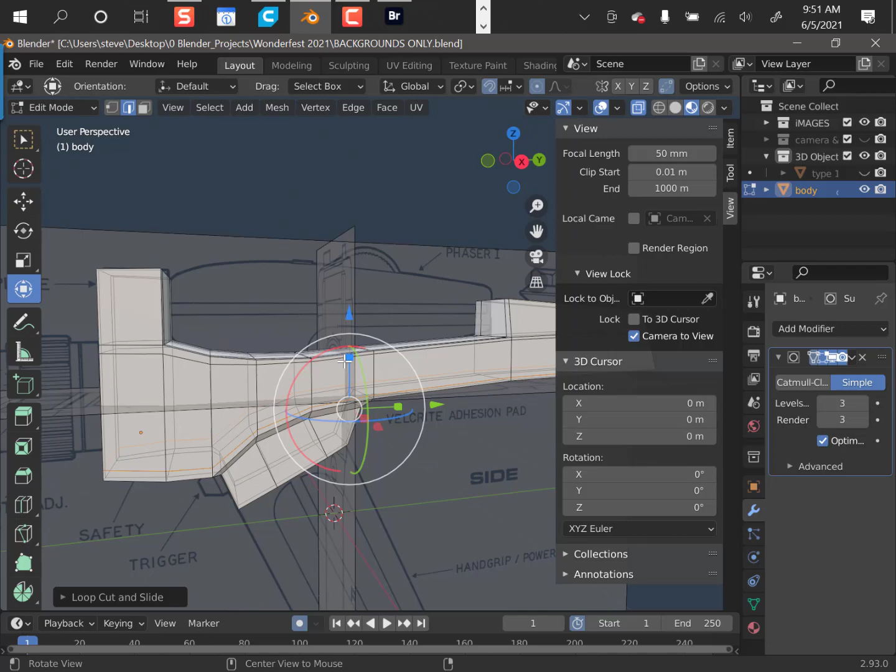And let's go do the top, the sides here. Command R, click and hold that edge. Command R, click and hold that edge. Okay, now we take a look at it, and into Catmull-Clark. There you go.

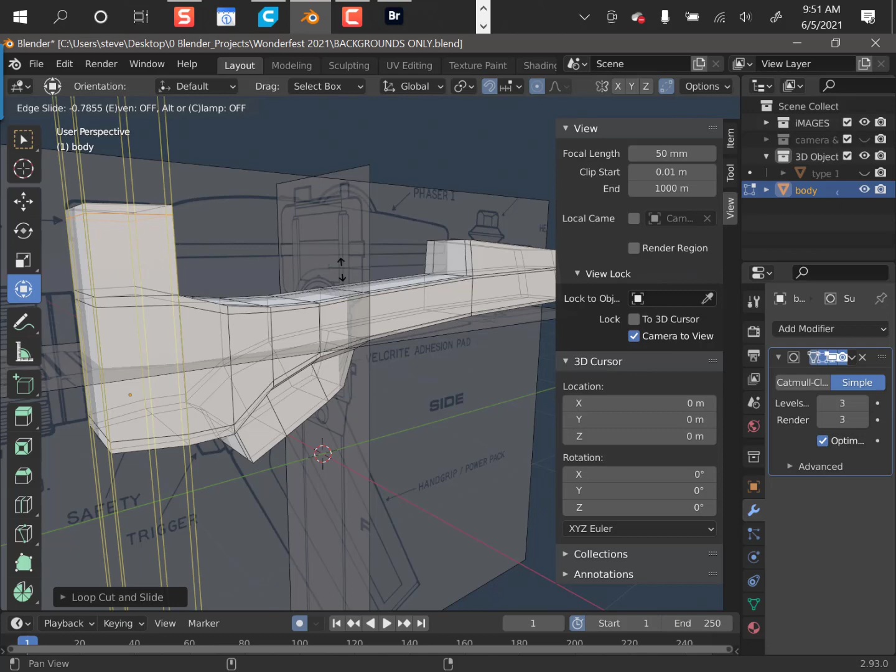Is that making sense? So this back end here, just or even the top end right up here, is getting really rounded. It's the same thing - just grab it, put an edge loop in there. Click, it will hold that shape just like this. We need a couple more to hold the front and the back shape.

So Command R, hold that shape for the front. Command R, hold this shape for the back end of this top part. Okay, so now going to Catmull-Clark, there it is, and it's nice, smooth, and rounded.

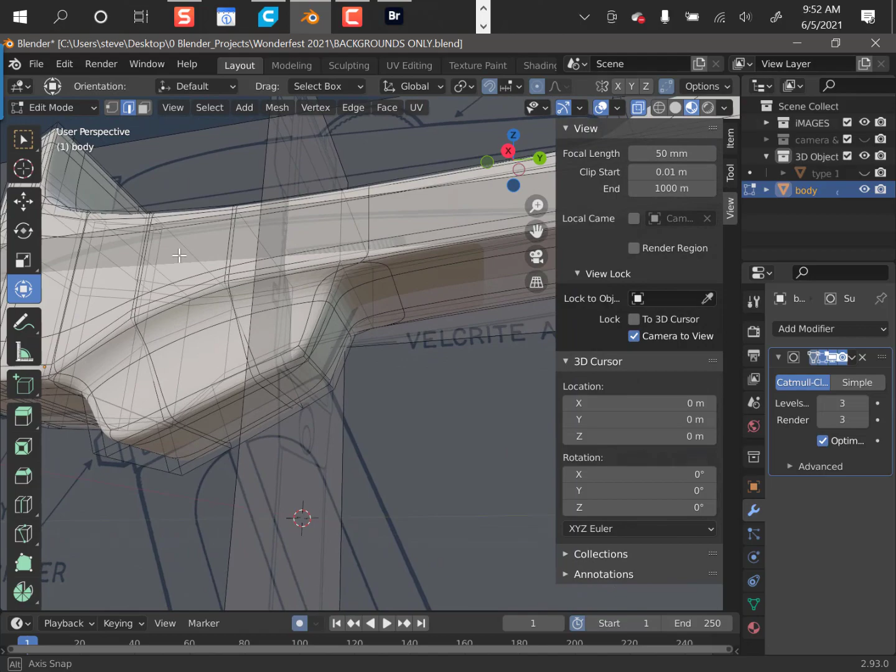Okay, now see, look, that's even looking pretty good down here, right? We want this to be more a little flatter, and I can stay in Catmull-Clark here. Command R, come down here, watch, click and hold, and I can actually move it around so you can actually see how it's really going to affect that section there.

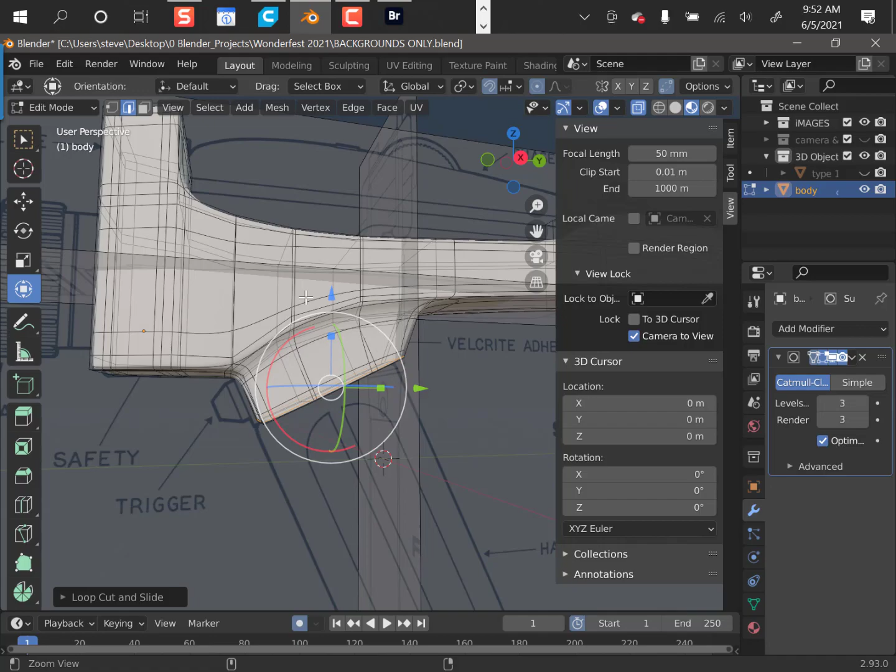And if I want to add one more, because I'm looking at right here, that's probably a little - I want a little bit less of a smoothness, a little more of a tighter area in here. Command R, come on, find it, come on, there you go. Click and hold, and see, you can control that.

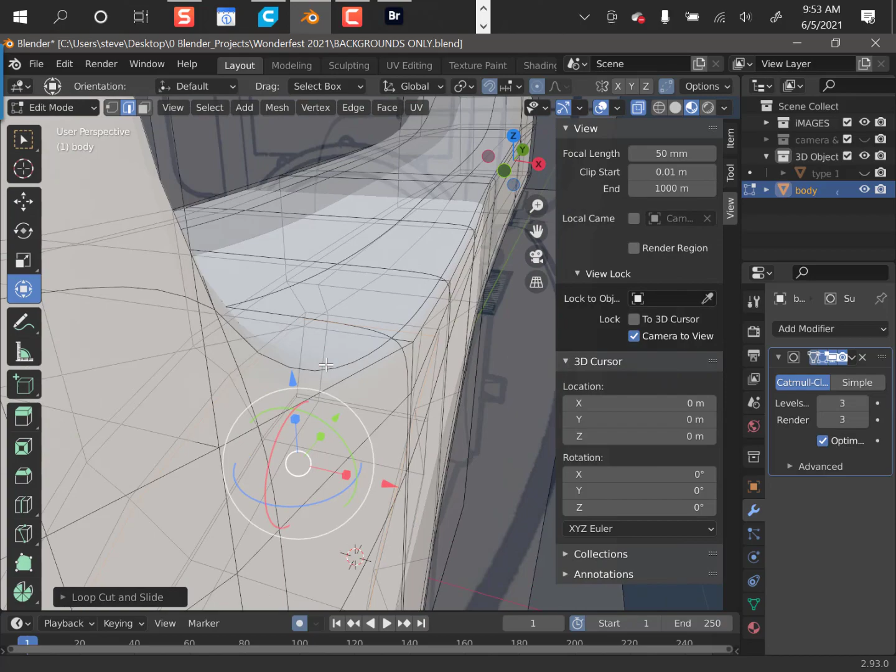There it is. And then you will 3D print these by saving them out as STL files, standard tessellation. So, file menu, export as an STL file. That's the format that 3D printers understand.

Questions? Yes, what if you don't have a line drawing to start out? Good question, that's often my situation when people say, Steven, design me a custom full build Starship Enterprise and use your imagination. So basically what I do is go into the program and throw some objects in there and play with it. Well, that's not entirely true. I always go get references. I go to the internet, look up Starship Enterprise or Constitution class builds, look at what everybody else has done, get ideas, and throw them together to make my own. That's basically how I do it.

Something cool for that is there are programs that help you match perspective on photos. There's one called fSpy, where using the same photo it tries to figure out the angle the photo was taken from, so you can see from that angle. All right, let's go look it up now. fSpy, you said? Yeah, we'll look it up.